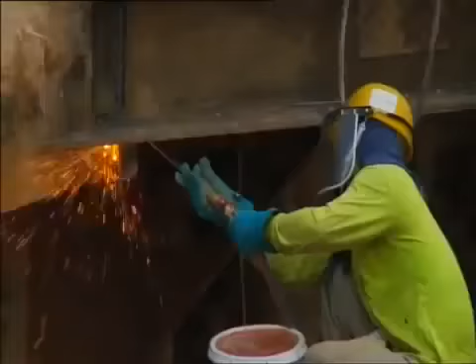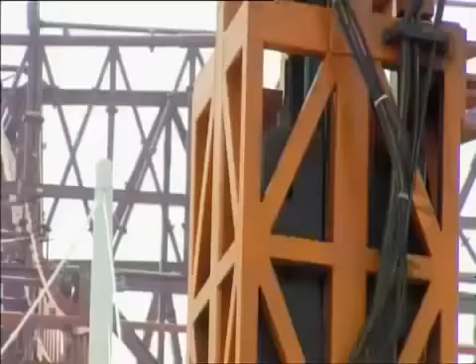Singapore's Marina Bay Sands is one of the world's most complicated construction projects. Engineers have to build not one, but 3 skyscrapers that will shoulder a sky park as big as an aircraft carrier. Worst case scenario, we get stuck. They have to devise ingenious solutions to assemble a 60-metre tall museum of impractical dimensions, install giant artworks, and erect seemingly floating pavilions for shopping and entertainment. If engineers succeed, they will create a virtual city unto itself.

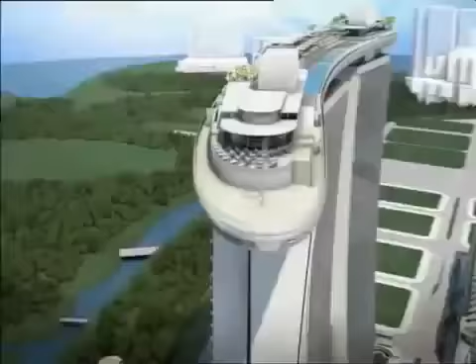Singapore, the Southeast Asian country, is smaller than New York City. The lack of space forces it to build its largest leisure and entertainment hub to date on a small tract of reclaimed waterfront land. The Marina Bay Sands. It's not one megastructure, but many. Serious challenges lie in the array of buildings that form the unique complex. 3 57-story hotel towers slope at such great angles, they're in danger of buckling under their own weight.

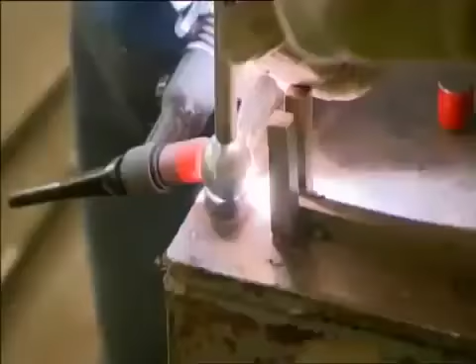An even bigger problem is the hotel's roof. A 340-metre sky park spans its length, containing gardens, outdoor pools, and the world's largest cantilevered observation deck. But how do you build something as big as an aircraft carrier, 200 meters in the air? In the hotel's atrium, mammoth works of art have to be somehow incorporated into the architecture. Its challenging centerpiece, a 15-ton mass of steel by a renegade artist from Britain.

A 60-metre tall art science museum is designed for maximum visual impact. It will be to Singapore what the Opera House is to Sydney. Only one problem. It seems too impractical to construct. And a set of dramatic glass-encased pavilions, while themselves pose little challenge, have to be built in water.

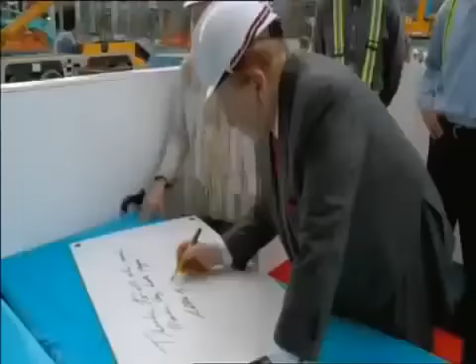The man behind the Marina Bay project understands the risks, but he believes that anything short of astounding will fail. Sheldon Adelson, one of the world's richest men and CEO of Las Vegas Sands Corporation. What we hope to accomplish is to change the face of Singapore tourism. So we expect a very successful development. That is by far the largest and most expensive single project we've ever undertaken. It'll cost about 5 to 5.5 billion US dollars. It's a lot of money. Now, I know $1 billion doesn't buy what it used to, but by any measurement, it's a lot of money today.

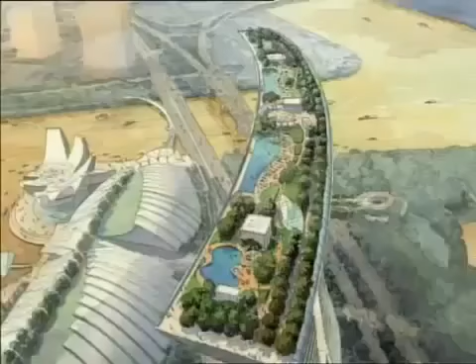Adelson believes his huge investment is safe in the hands of Moshe Safdie, a world-renowned architect. Safdie is recognized for his use of dramatic curves and geometric patterns. The Marina Bay complex will be his largest and most difficult project yet. I think that architecture has to be timeless. Therefore, what it espouses, what it provides, needs to be something that has a long life. What's unique about Marina Bay is all the pieces coming together. You can't think about it as individual buildings. You've got to think about it as a piece of city. It's much more a symphony than it is a sonata.

On the ground, engineers are more concerned about the reality of building Safdie's vision. This is the North Retail section area. 30-year veteran John Downs is in charge of overseeing the entire project. The design is very, very diverse, and each component of the project is totally different from the others. For a project of this size, with the planning, with the design, with the construction, you'd be expecting somewhere between 6 to 7 years. Here is basically a 3-year turnaround.

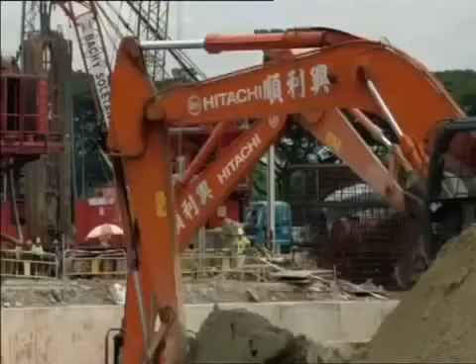The first and most critical construction task is to secure the footprint, though this normally straightforward job proves otherwise, since the site was originally allocated for boats. The complex sits on 560,000 square meters of reclaimed land, part of a decade-long plan to revamp Marina Bay, a former saltwater estuary that's now a freshwater reservoir. Beneath the reclaimed land, which is essentially a seabed, is a dangerous layer of marine clay. Sometimes called black toothpaste, marine clay has very poor structural properties. If not given complete respect, the unstable marine clay is potentially fatal.

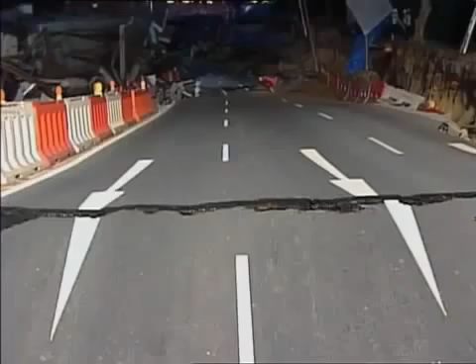In 2004, Singaporeans discovered the lethal consequences firsthand. A routine excavation in an underground tunnel for the mass rapid transit network causes a collapse, creating a gaping hole in the Nicoll Highway, killing 4 workers. The ground conditions in which they were building the Nicoll Highway were not dissimilar to those we are encountering here. They had also soft clay, they had similar depths of excavation between 20 and 37 meters. One of the big things that was learnt in the Nicoll Highway collapse was the importance of monitoring movements and the control of quality as the construction proceeds.

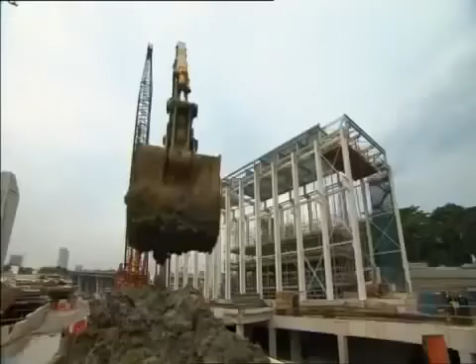Marine clay is an old foe of engineer Mike Barton. He's defeated it in the past by understanding how it behaves. The big problem with marine clay is that it is so soft that when you dig out the inside, the walls will move and potentially collapse and allow all the surrounding water in the bay into the excavation. So, before work can begin, the unstable building site needs major fortification.

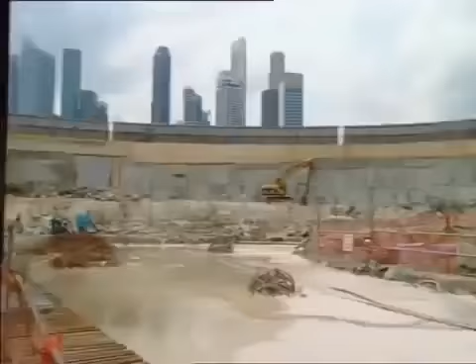To combat marine clay, engineers decide to build giant concrete walls to create stabilizing perimeters for the larger buildings, known as diaphragm walls. Up to 1.5 meters thick, diaphragm walls are steel-reinforced concrete sections, pounded 50 meters into the ground. They form watertight enclosures for men and machines to work round the clock. In just 1 year, over 4,000 meters of diaphragm walls help produce a rock-solid foundation.

The diaphragm walls that we constructed in a formation which we called a peanut formation, which is 2 circles joined together, and a donut formation, which is circular, is that they are able to withstand very, very large forces from the marine clay without any movement. They encapsulate an area that's bigger than a football pitch that enables us to excavate very quickly and to build structure up very quickly.

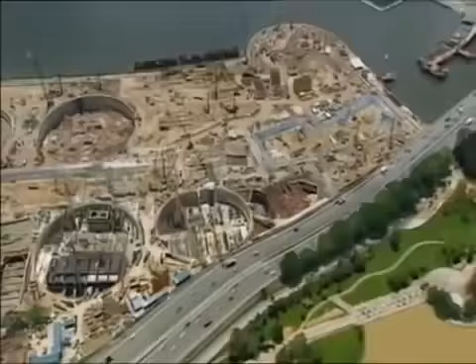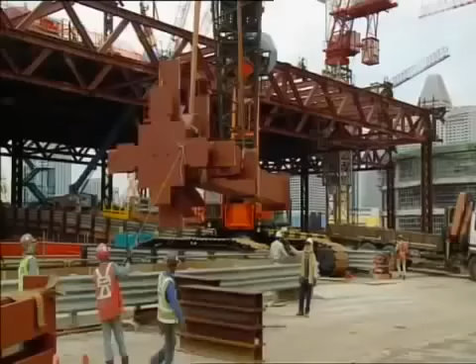Securing the footprint of the Marina Bay project has already taken a year out of John Downs' schedule. He now faces the difficult task of erecting the resort's many buildings in a space of just 2 years. Just managing the whole logistics of that, including the construction methodology, is very, very challenging for us. 1, 2, 3. To meet his tight deadline, Downs chooses the most direct solution. He hires 16,500 workers to construct every single building, simultaneously. It's like leading a small army. So organizational excellence is key.

We're just on the edge of Singapore in the CBD here, so rather than lose the contractors and the workforce to go off-site, we built our own 3-story project office. We have all of our contractors, our subcontractors here. We house our resident site staff. We have our project management team. We have our construction management team, our design management team, and the logistics here.

Come lunchtime, the monster workforce creates another massive challenge for Downs. He responds by building one of the world's largest site canteens. We've got 13, 14 different food styles here. You can see by my shape and size that I eat here every day. I enjoy this food. So here you can see the project bakery. It has its own ovens. It's set up for breakfast. We cater for sandwiches during the course of the day.

Can I take a sausage roll, please? So, freshly cooked food, straight from the oven. We stand by our products.

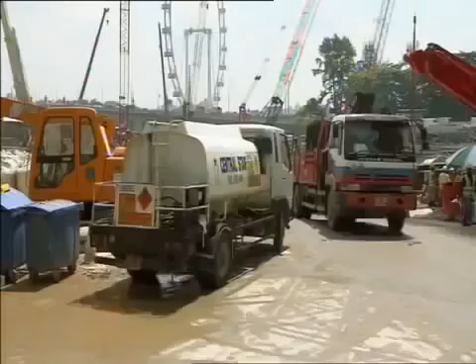The tight schedule also creates problems at the hotel towers, where engineers are already struggling with a congested site. The important thing to do is to make sure that they come in and deliver the goods straight away and then get out again. We don't want too many vehicles on site at the same time. To speed up construction and alleviate traffic congestion, engineers turn to a method that's proven itself countless times in the field: in situ concrete casting.

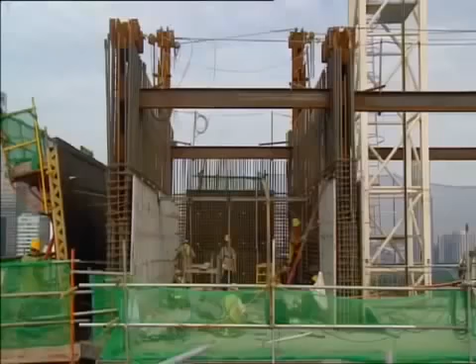Hotel walls are made on site in the thousands. And workers laying the floors are so proficient, they produce 1 floor per 4-day cycle. It's an impressive display for a conventional solution. But the structure they're attempting is anything but conventional. The key challenge of building the hotel towers is its unusual design. Unlike other skyscrapers, part of the towers slope at incredible inclines. Like a set of collapsing dominoes, the towers could buckle under their own weight if a practical building solution is not found.

It's a major concern for engineer Craig Glover. I've been in the industry for 25 years, done a wide range of projects in many different countries, but nothing compares to this whatsoever. There was nothing we could take reference from across the street on the next high-rise or across town. This is a new frontier. Costing a staggering $5.5 billion to build, the Marina Bay Sands could be one of the world's most expensive mistakes if engineers can't solve the tower's problematic structure.

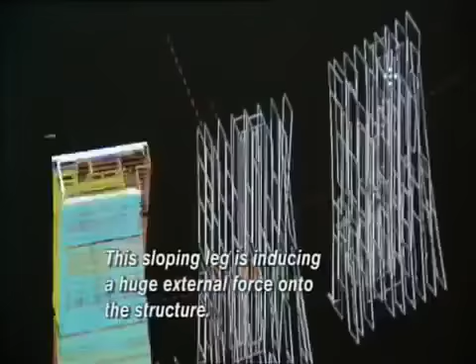Engineer VC Cheong leads the design team, and their solution comes out of left field. If you look at the configuration, it's not a straight tower. It's with a sloping leg. So all this sloping leg actually is inducing a very huge external force onto the structure. We can't build it without any support. So we actually formulate a solution to prop up the sloping leg.

Using a technique they've never employed before, engineers build large temporary struts made of strong structural steel. They prop up the sloping towers as they rise. Like a suspension bridge, high tensile steel tendons, also known as tension cables, give an added layer of support inside the walls. In theory, both the struts and the tension cables are temporary and will be removed once giant link trusses connect the towers at the 23rd floor.

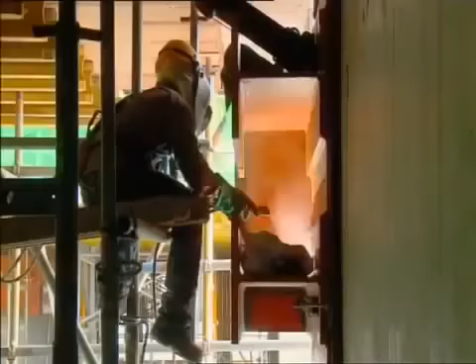The sheer weight in concrete is enough to topple the towers at level 8 if the engineer's calculations are wrong. To reduce the chances of failure, Glover and his team make a radical decision. Instead of removing the temporary tension cables in the tower walls, they make them permanent supports. I feel good it's in there because it's added strength, it's added support.

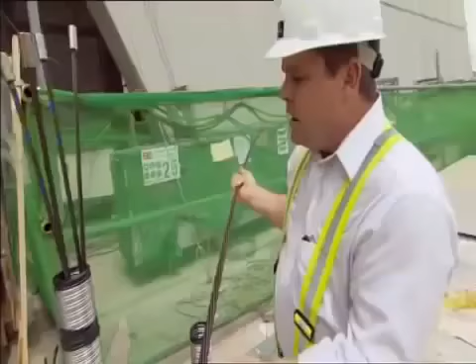We have a twined network here of high-strength steel. And what we do is we bundle these up so they form a cord with multiple strands inside this conduit. We place this conduit inside the walls prior to casting the concrete. So what we then do is once the concrete is cast, we anchor one end into the concrete. We then put a very high-strength pneumatic jack onto the collar and one by one pull these strands through and tension them up. What that does is basically pull the building back and hold it in place.

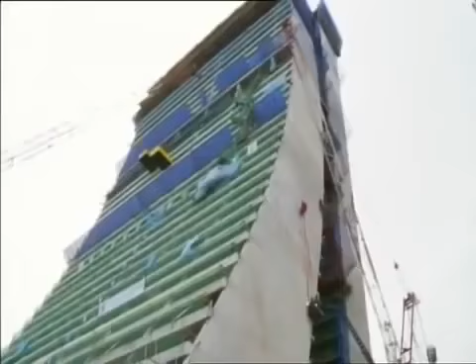If these cables were to suddenly break or if they weren't in place, we wouldn't be able to control the self-weight as we build more and more of the building up. So it's a very important part of the actual engineering of the solution to hold the building in place until we can connect it.

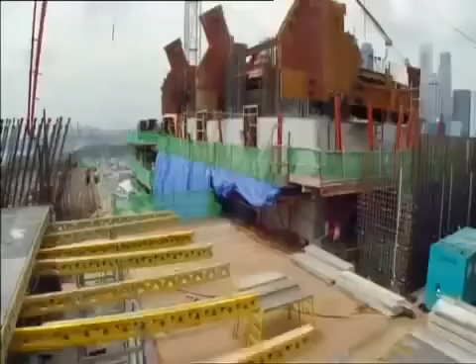Despite the team's quick thinking, the true test of their engineering decisions will only happen once the main support struts are removed and the massive link trusses installed. Link trusses are huge reinforced steel brackets that bind the towers at the 23rd floor. Once their installation is complete, they transfer the sloping tower's weight completely away from its temporary struts.

Once we're satisfied that we don't have any stability issues, then we can bring the large hydraulic cranes in and member by member start to dismantle the struts. It's got a lot of time pressure, so we just got to make sure that these things keep moving. It's done its job holding up the building, now it's holding up the job.

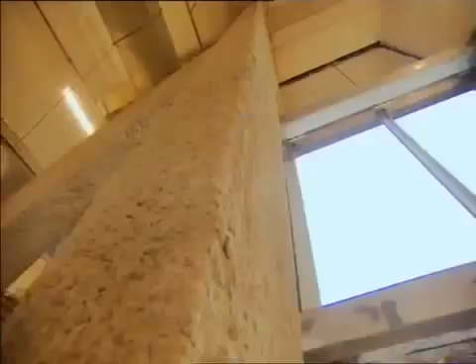As the last pieces of support struts leave the site, Glover and his team can finally breathe a sigh of relief. The link trusses are holding the building load. So far, so good. It's a lot of theory, a lot of calculations, but until you really do it and really get it out of the building, you never quite know. I'm always waiting for the phone to call in the middle of the night that something's gone wrong.

Not all the structures have ended up according to plan. The 60-meter-high Art Science Museum is facing a major design overhaul. Planned as a venue for blockbuster exhibitions on the arts and sciences, its bowl-shaped roof doubles as a 3,000-seat amphitheater. Unfortunately for engineers eager to start its construction, architect Moshe Safdie isn't happy with its current shape.

Somebody looked at them and said, looks like a bunch of bananas. In fact, Mr. Adelson said, looks like a bunch of bananas. I said, well, if they look like a bunch of bananas, we're not there yet. And do the structural engineers have a preference? It's terrible news for Safdie's design team, especially its principal, Gene Dyer.

There are times that Moshe will come in with an idea. We think it's quite exciting. We'll pursue the idea for weeks or even months. He'll come back and say, I want to change the idea. And we've already bought into the idea, so it's a bit frustrating.

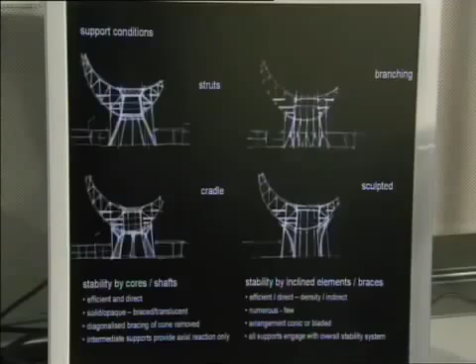To rework the unique geometry and dimensions of the Art Science Museum, Dyer and his team turned to advanced 3D modeling programs. It not only makes navigating the museum's complex geometric patterns easier, it shortens the process to a matter of days. The model is dynamic and it can be moved by just changing one or two elements. Moshe could experiment. He could make rapid judgments in a very short period of time about which way he wanted to take the project. This is a process that was impossible to do 10 years ago. Without the computer, this would take years and years.

Nautilus form effectively became... To rationalize the new look into a buildable structure, architect David Robbins splits the museum into spheroid segments. We began to look at using different spheroids to define the different upper and lower surfaces of this building. That gave us a very rational way of describing the plan form to our clients.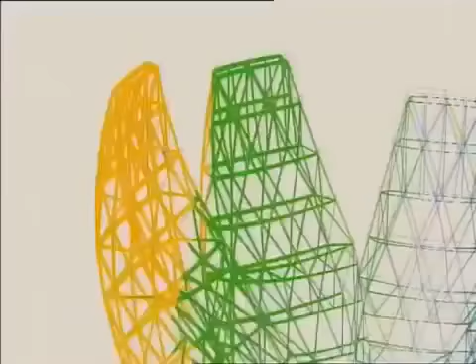After months of refining the design, Safdie is finally happy with the result. The mathematical precision that we gave them made them even more beautiful. It led some people to say, well, hand of welcome. Others said, is that a lotus? And the more ambiguous the associations, the closer I thought we were getting to our target. Because I think the least exciting buildings are those which have overt symbolic associations.

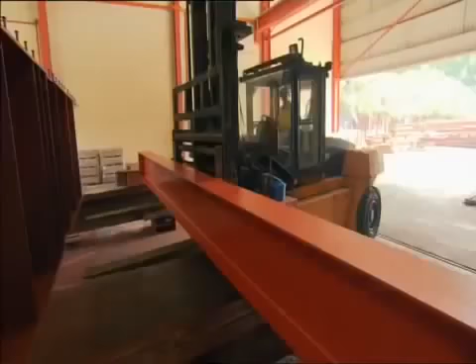Armed with the new design, engineers begin work on the museum's 60-meter-high superstructure. A staggering 5,600 steel elements, weighing some 5,200 tons, are prefabricated to exact specifications. They are then trucked onto site and assembled. It's like putting together a giant jigsaw puzzle.

Each element has to be installed with pinpoint accuracy. If it's even a few millimeters off, engineers will have to start from scratch. Engineers of the massive atrium at the base of the towers are facing an equally tough construction process.

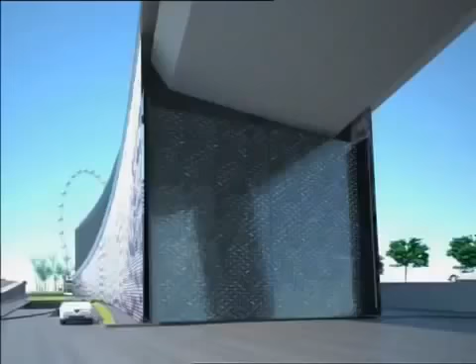Safdie has come up with a challenging design. He wants to inject art into the atrium's architecture, so that visitors will feel like they're walking through a grand Gothic cathedral. In medieval times, if you think of a Gothic cathedral, there's the architecture, there's the stained glass windows, there's the sculptures on the pinnacles. You cannot draw a line and say art and architecture. Art and architecture are one, they're singular experiences. And I think what we try to do here is come back to this integrative mode.

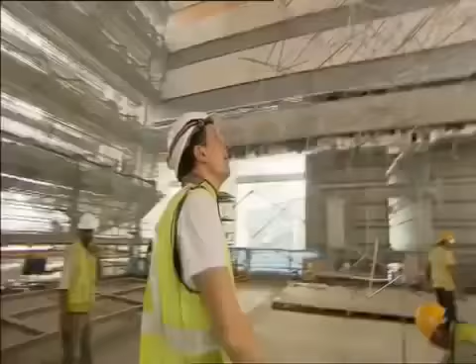To create the centerpiece of his vision for the atrium, Safdie commissions renowned British sculptor Antony Gormley. Famous for his unusual approach to art, Gormley is the brains behind the Angel of the North sculpture in northern England. What he's about to attempt is proving to be more of a construction challenge than an artistic one. A cloud-like sculpture some 40 meters long, made up of 15 tons of high-grade stainless steel, hung 12 stories above the atrium.

The Angel of the North is, in a way, making a very traditional public sculpture because it's isolated in space at the edge of a valley. You can see it for miles and miles. It's very much about occupying space. This is about activating space. You can't see it for miles and miles. You have to be in the space with it. Each viewer, every person coming out of their hotel room will confront this big chaos thing and have to find their place in it. I think that's an exciting thing.

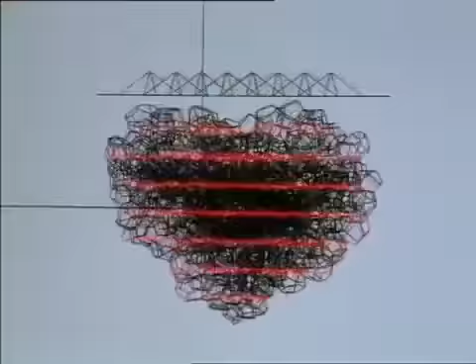Called Drift, Gormley's steel sculpture is so huge and so complex that it can't be sculpted using traditional methods. Gormley's team has to create state-of-the-art 3D computer programs that translate his ideas into buildable plans. But just as they're about to begin construction, a bombshell drops. September 2008, a global financial crisis wreaks havoc on markets. The flow of the hundreds of millions of dollars that keep the Marina Bay project going every month suddenly stops.

For engineer Matthew Pryor, it's a massive blow. I feel devastated. It couldn't be worse. Probably the worst day of my life professionally. There's no more money coming through. So unless we put some funding in place or there's something, we're going to have to shut the jobs down. There's a tough decision to be made, and we don't know what we're going to do just at this point in time. With the future of the multi-billion-dollar project plunged into doubt, all eyes turn to the man behind it, Sheldon Adelson. The next move of one of the world's richest men will determine the fate of the mega construction site.

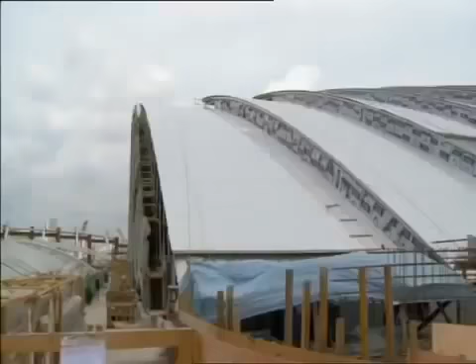The 2008 global financial meltdown is a haunting echo of the 1990s Asian crisis. Back then, progress on Shanghai's World Financial Center came to a complete halt for 5 years. For Adelson, that's simply not an option for the high-profile Marina Bay resort. His vision of changing the face of Singapore tourism is at stake. And so are billions of dollars of investment from his Las Vegas Sands Corporation. He prefers finding a stopgap solution to weather the storm. Throughout history, there has never been a trend that went straight up, nor a trend that went straight down. So it goes up and down. It's only a matter of time when things will recover.

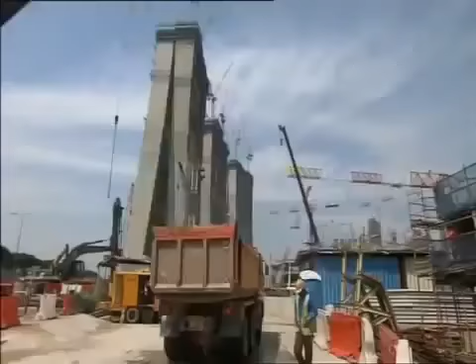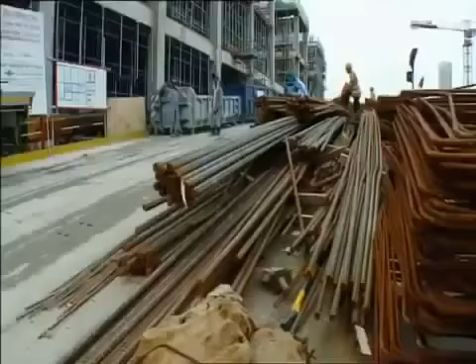In a bold move, Adelson pledges his vast personal wealth to the completion of the project, effectively ending any speculation of failure. There's a massive sense of relief in the company. I mean, everyone pleasantly surprised how quickly we've got through this and the fact we could hold it together and get it going again. So euphoria is probably the best way to describe it. With the crisis averted, construction on the 3 57-story hotel towers, the casino, theatres and convention centre resumes at pace. Everywhere you turn, steel is being installed. It's vital reinforcement for every concrete structure on the 15.5-hectare site.

For one project at the tower's atrium, steel is more than just reinforcement. To construct the 15-ton Drift sculpture by British artist Antony Gormley, engineers had to first laboriously prefabricate it into over 70 segments. The segments are then welded into 8 slices and will ultimately form the sculpture. It's a tricky operation, but engineers are able to complete it swiftly due to a system of codes and numbers that enable them to quickly identify what goes where.

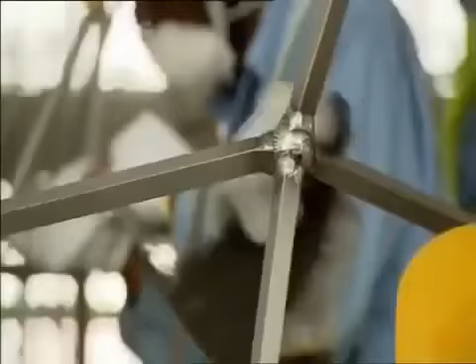Once all 8 slices of Drift are fully assembled, it's lifted up into position by a temporary lifting frame. A massive box truss on the atrium ceiling then takes over the load. In theory, the box truss will support the weight of the lifting frame as it's being lowered down. It will be a heart-stopping moment, especially for engineer Graham Stevenson. The lifting frame is about 9.5 tons, so when it picks up and gets some momentum, there's a potential that it just wants to flick over and rotate through its full 90 degrees, and we won't have it under control.

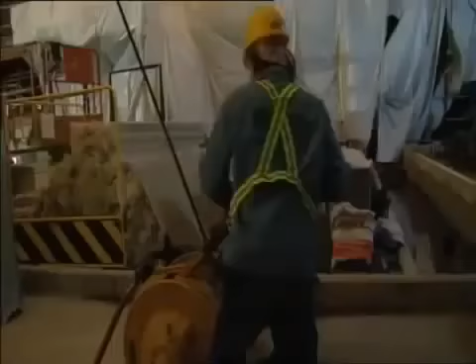Stevenson's solution: 4 powerful automated hoisting drums located at the 4 corners of the frame. They allow workers to control the strength and speed of the operation with high tensile steel cables. A spotter at the top determines the pace of the procedure and marshals the team. With their preparations complete, it's time to face the moment of truth.

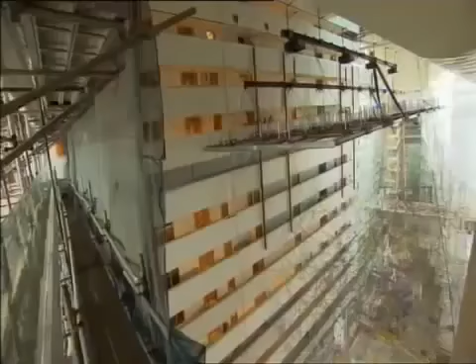Sculptor Antony Gormley is as anxious as any of the team. The entire operation is estimated to take up to 10 hours to complete. As soon as the frame is in motion, there's no turning back. Midway through the lift, Stevenson receives reports of a potential problem.

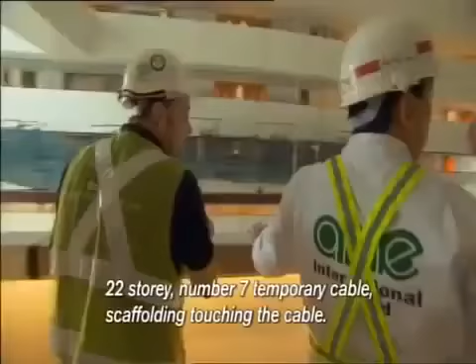22-story, number 7 temporary cable, scaffolding touching the cable. Why you got the temporary cable touching the transverse? Yeah, but is it just the end of a tube? Yeah. So you can just cut the tube? Yeah. Problem solved.

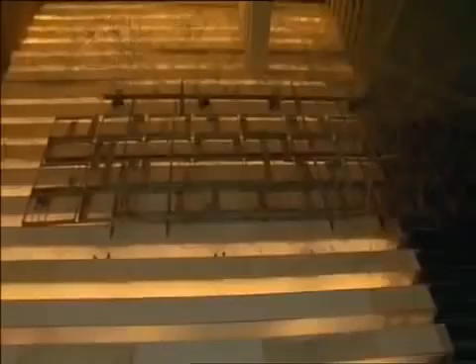But what was previously an estimated 10-hour procedure now turns out to be a 24-hour marathon lift. At 6 a.m. the following morning, they complete the job. Absolutely fantastic. The Gormley's now finally in its final position. So really an end of a long and exhausting day, and big thanks to everybody, but it's finally done.

While the drift settles into its new home at the hotel atrium, elsewhere attention is focused on one of the project's key features, the crystal pavilions. The two glass-encased buildings by the promenade are set to be the resort's premier shopping and entertainment complexes. But before engineers can make them a reality, they have to secure their footprint. And already a major obstacle threatens to sink their objective.

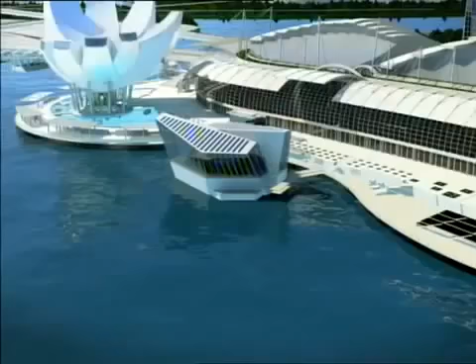The crystal pavilions are situated within the confines of Marina Bay. So to found it, engineers have to find a way to build in 6 meters of water. The responsibility of tackling the problem falls on the shoulders of engineer Kurt Vella. I'm from Sydney. The underlying foundation in Sydney is sandstone, it's rock. All you need to do is just dust off the surface and you can build skyscrapers on it. Here it's very different. All the structures have to be heavily founded.

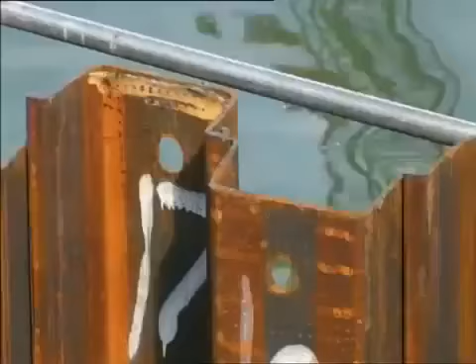To keep water out of the construction site, only one solution seems viable for Vella and his team. A waterproof steel structure called a cofferdam. This temporary formation surrounds the worksite with a circle of steel sheet piles, creating an impenetrable shield that locks out the water, keeping the workers safe within. For the job, they rope in a 12-ton vibro hammer. It punches the sheet piles deep into the earth, making the cofferdam rock solid and resistant to movement.

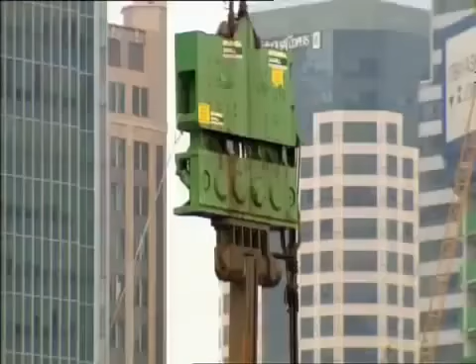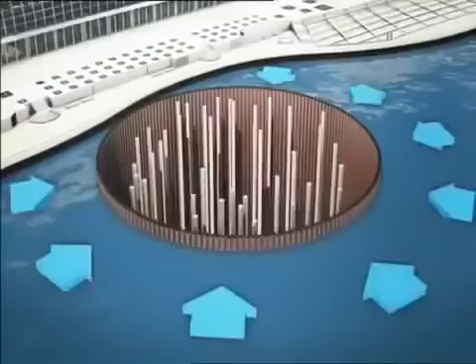With the cofferdam secured, engineers deploy powerful diesel pumps and run them 24 hours a day, ejecting any water that remains within the walls. This last step comes with inherent dangers. The force of the water outside creates what engineers call hydrostatic pressure. In theory, it's powerful enough to force water through any gaps in the cofferdam. It's something that Vella prays will not happen.

There's a bit of hesitancy and concern because we've got to build this building in the middle of Marina Bay. Everybody can see what we're doing, so if it leaks, it's a problem. If it fails, if it moves, if it collapses, it'll be an absolute catastrophe. After a day of pumping, Vella's worst fear comes true. Parts of the cofferdam are leaking.

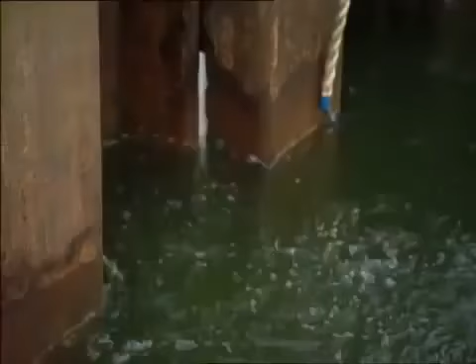To rectify the problem, Vella orders a team of 8 divers into the water on 10-hour shifts. Their mission? Find out where the water is being forced in and plug them shut with epoxy resin. Anson Lee is an 8-year diving veteran. The toughest part of my job is the environment. The visibility is poor here. It is totally zero, I cannot see anything here below. I solve that by feeling the suction and then feeling out the thing.

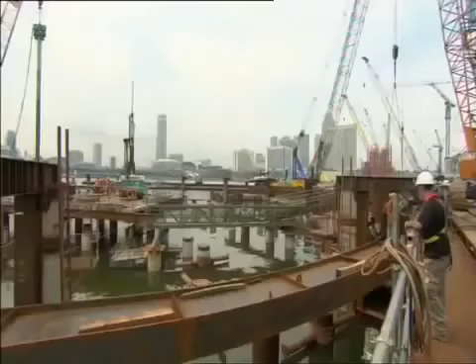You have to overcome all the fear that you can't see under the water, but okay lah. I feel proud to be one of this team to build this thing out. After 2 weeks of hard work by divers and the pump crew, the job is finally complete. Kurt Vella can also breathe easy. Every job is different, every job has its challenges. You plan and prepare, you try and identify your risks in advance, and you try and come up with contingency plans. And that's what's really enjoyable from my perspective. That's what gets me out of bed in the morning.

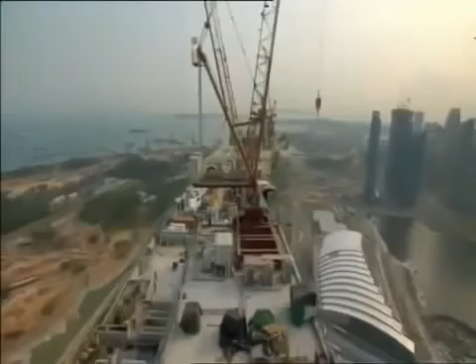After 2 years of battling the elements, and overcoming difficult construction milestones, the 3 sloping towers of Marina Bay Sands can finally celebrate their topping off ceremony and move on to the next phase. But a destructive force of nature threatens to throw a spanner in the works. With climate change predicted to affect the pattern of Southeast Asia's typhoons, Singapore may one day experience the destructive tropical storms plaguing its northern neighbors in the Philippines and Taiwan.

When that happens, typhoon-force winds could spell disaster for the hotel towers, especially the 340-meter sky park sitting on top of it. The force of the wind can make both buildings sway dangerously, causing irreparable damage to the structures.

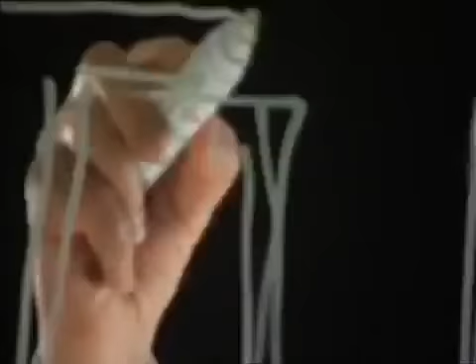The Sky Park, offering 360-degree views of Singapore. The visionary design will have enough surface area to park 4.5 Airbus A380s. But when architect Moshe Safdie first mooted it, it stemmed from a purely functional need. Luxury hotels, as we think of them, always have lots of open space around them, gardens, at least in the kind of tradition. But we didn't have much space left.

And at that point, I figured, well, if we cut out of an extrusion of foam the kind of slab that goes over those 3 towers, and we placed it there, and we said, what do we have here? My God, that's some park. And so that's where the idea was born. That's what makes us a resort. Safdie's revolutionary idea scores points for ingenuity, but it clearly isn't what nature intended.

Typhoon-force winds threaten to rock the towers and its sky park, causing unimaginable damage. If engineers are to make the building a reality, they'll need a rock-solid solution. Still got to do all this cladding. Engineer Tony McKee has little time to make things happen. At the moment, we're running a couple of weeks behind what we'd originally planned. We're not entirely happy about it, but at the end of the day, we've got to do this safe and we've got to do it properly.

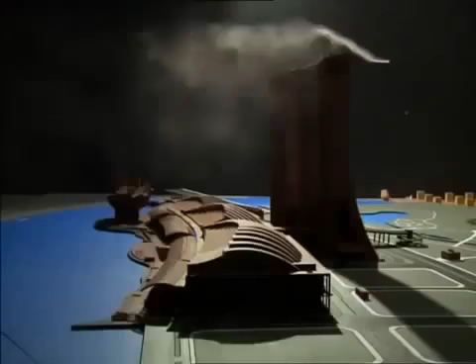To fight the enemy, McKee knows he has to first understand the enemy. He hires leading US wind engineers CPP to carry out extensive testing on the towers and Sky Park. Their mission? Find out how Singapore's potential wind forces affect the buildings. We turned that upside down. Wind engineer Roy Denoon oversees the process at their state-of-the-art wind tunnel in Fort Collins, Colorado.

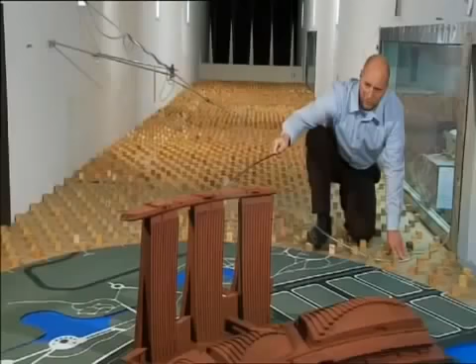The thing that makes this really special is the fact that we have this sky park running across the top, linking all the towers together. So whereas normally with a normal tower, we'd measure the loads on the tower in isolation, with this one, what we're needing to do is to measure the loads on all 3 of the towers at exactly the same time. So that way we can know how the towers are going to move relative to each other, so we can make sure that they're not going to put excessive strains or movements into the sky park.

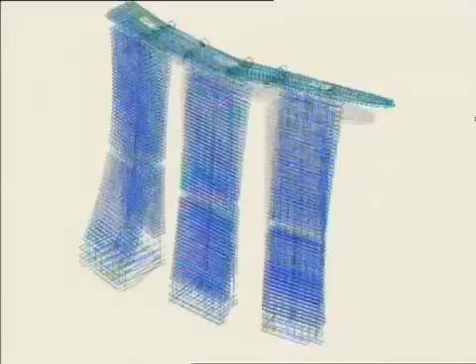During the tests, a scale model of the Marina Bay Towers is blasted with 40km/h winds to simulate faster typhoon winds in reality. Over 1,000 pressure measuring instruments inside the model register how the winds affect the buildings. At the end of the tests, engineers confirm that the 3 towers can deform by some 200 millimeters during the fiercest storm. Engineers quickly figure out a solution: movement joints. Inspired by bridge engineering philosophy, movement joints are essentially gaps located between the concrete towers. The huge gaps allow for movements of up to 250 millimeters.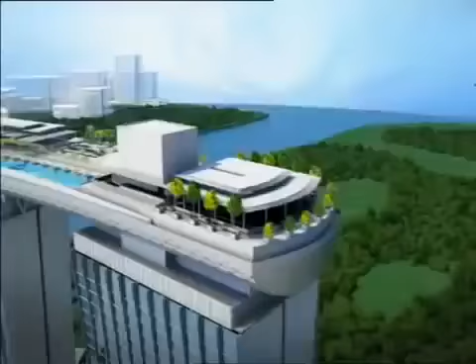Aluminium and stainless steel plates act as sliding components. They can move back and forward over each other, a little bit like you'd see in a flexible bus, where you have that articulation happening in the middle. It's a similar concept to that. To accommodate the differing movements of the three towers, engineers install multi-directional steel bearings below the sky park. The solution scores major points with Tony McKee. Only one problem. It won't work with a rigid structure containing 1.5 million litres of water. Any movement in the joints could fracture the sky park swimming pool, endangering lives and property below.

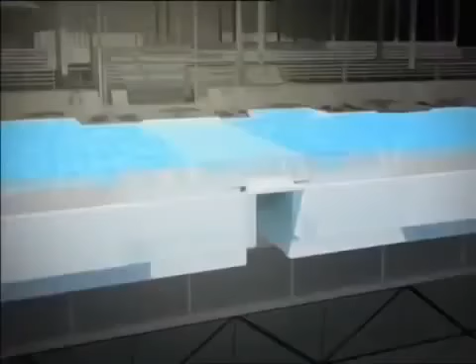With the help of US pool builders Natare, McKee quickly develops a solution, but it's completely unproven. A secondary system of movement joints built into the pool itself. The plan, to split the pool into 3 smaller 50-meter units. Steel top hats then conceal the gaps. Huge basins catch any runoff pushed up by the moving pools. McKee knows he only has one chance at making this work. So he commissions a trial by water.

What we've got here is the side of the swimming pool, which replicates the movement that we're going to get between the towers. And what the Natare guys have come up with here is a simple track system which can be pushed back and forward by a forklift. And that replicates the full range of motion that we have on the swimming pools, which can be 0 to 250 millimeters either way.

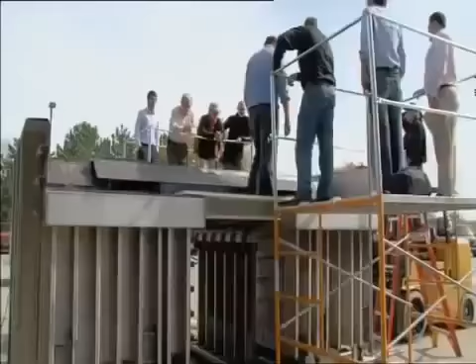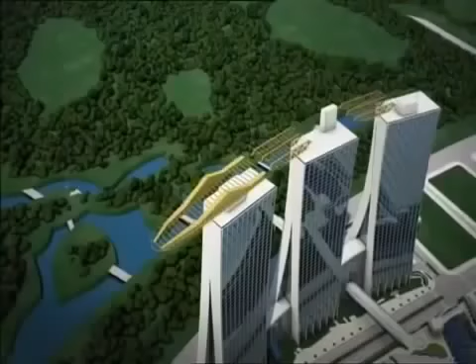It takes engineers weeks of testing before they're completely satisfied. Armed with the final results, McKee can now safely begin construction of the sky park. Consisting of some 10,000 tons of steel, the sky park is as big as an aircraft carrier. The most practical way for engineers to construct it is to break it into 14 segments on the ground before assembling it at the top of the towers.

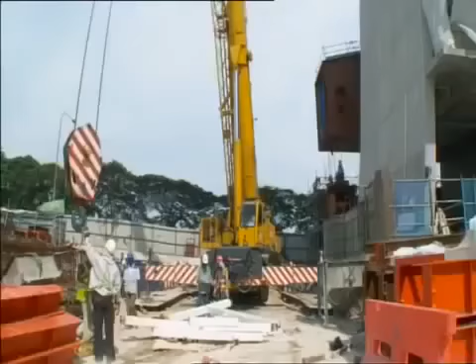There's no room for miscalculation at 200 meters in the air. Each segment is carefully prefabricated and tested by steel specialists Yongnam, and then trucked to the site independently. From the very beginning, McKee and his team anticipate that their biggest challenge will be lifting the 2 largest segments of the sky park, the box girders. Measuring 80 meters long, their combined weight is a staggering 1,400 tons.

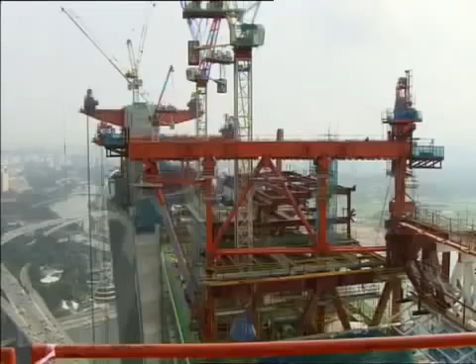How do we feel? A little bit of apprehension. You know, it's a significant lift that hasn't been done before. If something goes wrong, it could be really significant for us. To reduce risks, McKee turns once again to proven bridge building technology. In a process known as strand jacking, giant temporary lifting gantries made of strong structural steel will use powerful hydraulic jacks to lift the box girders up to the top of the towers before sliding them into place. It will be the longest and largest lift of its kind in the world, and McKee needs the best in the business. He puts a pioneer in the field in charge.

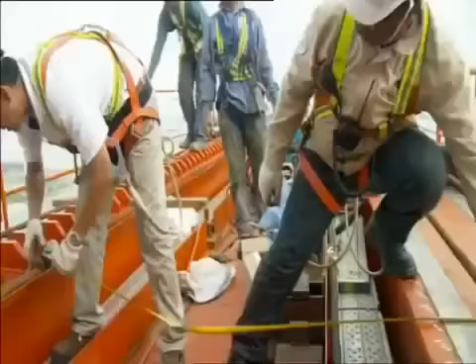Swiss-French company VSL. Engineer Eddie King and his team have successfully raised bridges, stadium roofs, and even Ferris wheels. The toughest part of my work is you have to plan everything very precisely, because everything is set up in millimeters. So we have to lift up and slide it in and position it in 5 or 10 millimeter accuracies. If we don't do it properly or safely, the biggest hazard is the thing can fall down to the ground.

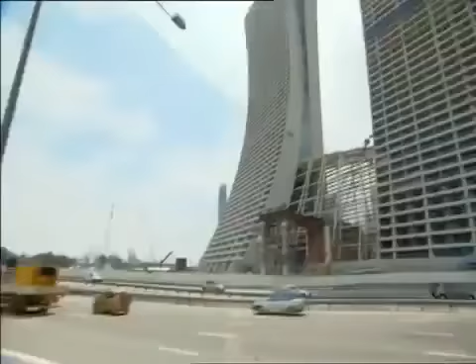Other factors further complicate the lifting process. Due to an increasingly tight schedule, the team is forced to conduct the lift during Singapore's annual monsoon season. It's almost impossible to predict when a tropical storm will hit. When it does, the accompanying lightning strikes can endanger lives. And because the whole operation takes place meters from a jam-packed highway, curious onlookers will be able to see any mistakes the engineers make. It's a potential public relations nightmare.

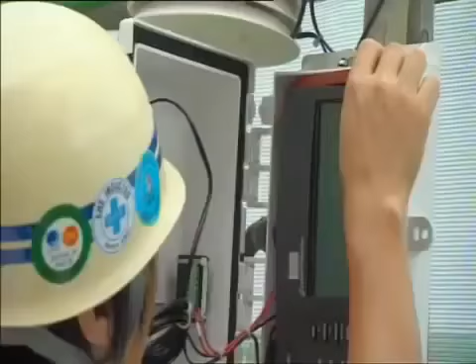Worst case scenario, we get stuck. And then we've got to figure out how to release it, how to continue lifting, because basically once we get going, we keep going. Okay, now I stop down. During an estimated 16-hour lift, the box girders will move at a cautious 14 meters per hour. Eddie King and his team constantly check their weather gauges for any incoming storms. The hydraulic jacks are also inspected regularly for overheating. No one wants the operation to stall in mid-air.

0.1 to 0.4. 288. Oh, that one, this one. Change to channel 2, yeah?

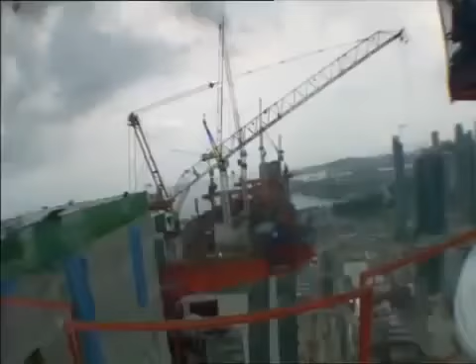Despite the team's best efforts, Mother Nature catches them by surprise. Okay guys, rain is coming. It's better we stop here. An approaching downpour threatens to grow into a lightning storm. We are at 200 meters above and the surrounding buildings are quite far away. So there's a chance of the lightning striking on a high point like this. So we have to stop and wait until the weather gets better before we continue our lift.

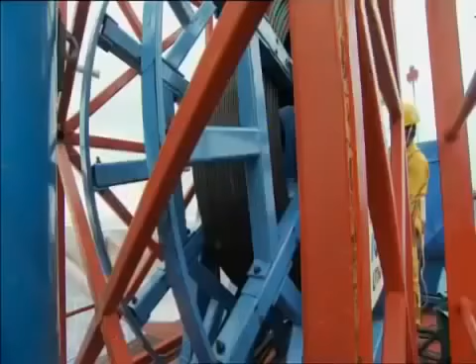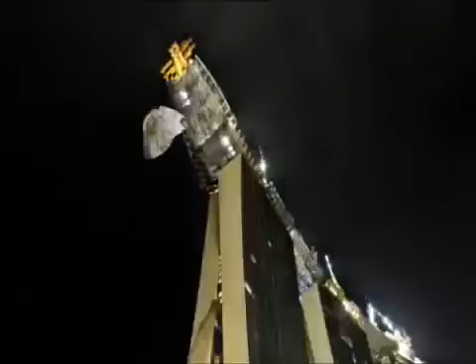With the lessons learned from the box girder lift, the rest of the segments go up smoothly. As the final piece rises into place, Singapore is already marveling at the team effort behind one of the world's most ambitious building projects. In just 3 years, engineers overcame seemingly impossible construction challenges, defeated marine clay, engineered ingenious design solutions, and survived the most debilitating financial crisis since the 1930s. As the finishing touches are put on the resort, the stage is set for an opening party, Singapore style.

Those involved reflect on the project that has already far surpassed their expectations. It's a bit overwhelming, you know. I'm in the process of disconnecting the umbilical cord. It's not easy for an architect. This type of project probably only comes around every 25 years or so. So it's been a lot of hard work, extremely challenging.

I really can't imagine, I couldn't list the number of challenges we've overcome along the way to get to today. Everybody is saying this is kind of a miracle, you know, never seen anything like it. And it's rewarding, it's nice. The Marina Bay Sands, Singapore. Proof that with visionary design and engineering know-how, megastructures can still defy the odds and fulfill the wildest dreams.